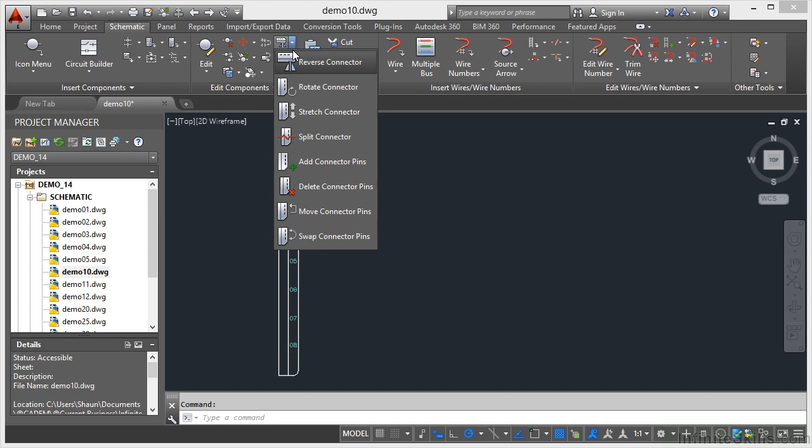Go up to the ribbon first, and in the Schematic tab, go to the Edit Components panel, click on the flyout, and you can see the Split Connector command. Click on it and come into the drawing area.

As soon as you do that, you have to select the connector block to split, so it's going to be this one here. Click on it, and then you're asked for the split point. Where do you want to split it? I'm going to go between 4 and 5, just there, and click on the block.

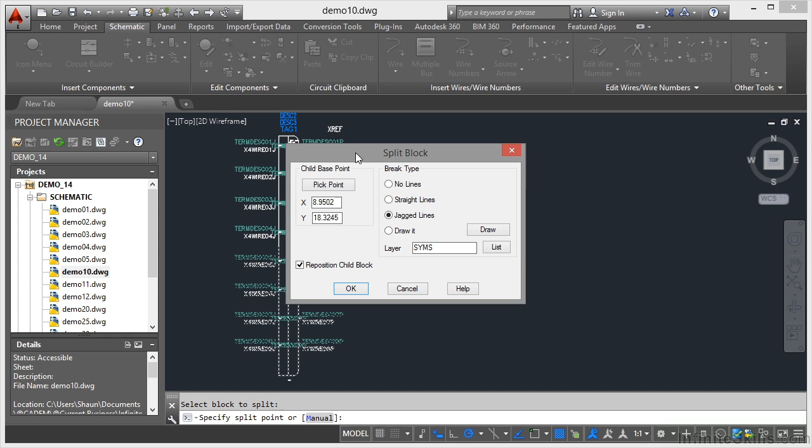As soon as I do that, a whole load of attributes appear, and you get this Split Block dialog box. Where you split it is the point where you separate parent and child. So this top bit of the connector block is the parent, and the bottom bit that you're splitting off and moving elsewhere becomes the child.

Obviously you want to reposition the child block, so make sure that option is ticked. You're going to pick a point where that base point is, or you can leave it as it is—it doesn't matter, because you've already split it.

You've got a choice of break type. You can have no lines, a straight line across the break, or jagged lines. I prefer jagged lines, so I'll leave that as it is. You can also choose how you want it to split—you might want to use just a diagonal line, for example.

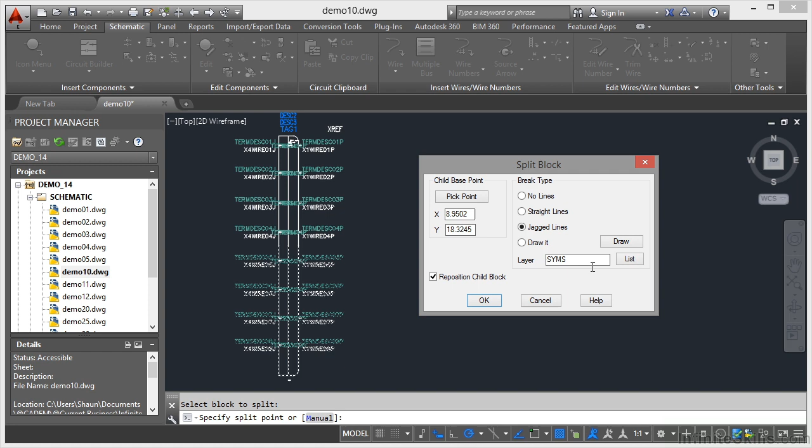The break type goes onto the layer SYMS, and you can list the layers if you want to and pick a different layer. I'm just going to click OK now. What will happen is I get my split—there's my split there, and I'm going to place it there.

Now where I've split that, you can see I've got my jagged lines. If I zoom in, there's the jagged line at the bottom, and there's the jagged line at the top. Now you might need to reposition some attributes—that's no problem at all.

You just click here, right click, and you still get the right-hand shortcut menu. Go to Attributes, and you want to move an attribute. Click there, select the attribute you want to move, which is going to be the PJ002 tag, right click or enter to confirm, pick a base point. I'm just going to move that up slightly, just so it sticks out away from the jagged lines, then press Escape or Enter to finish.

So you can see there that you've split your connector into two parts. Now you've got a question mark here—that's part of this block reference here now.

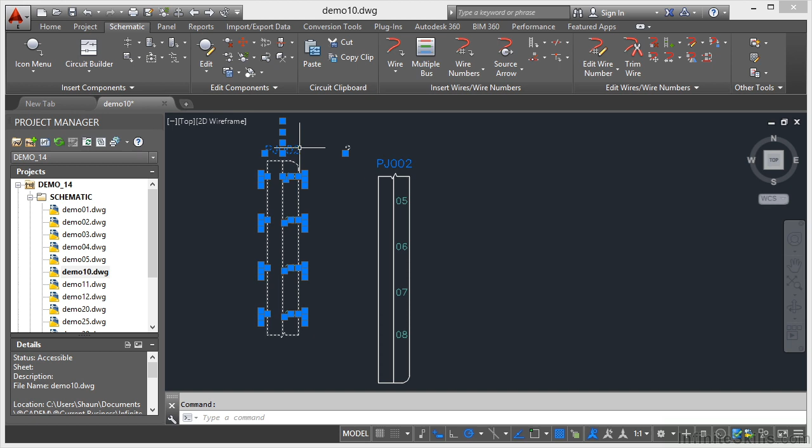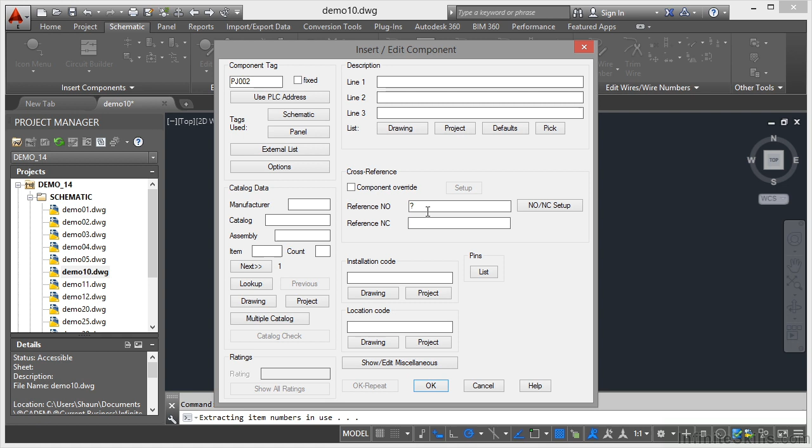So you can select it, right click and Edit Component on the shortcut menu, and you can see you've got PJ002 as the component tag. Now there's a question mark, reference NO or NC, so you don't know whether that's a normally open or normally closed reference. What you can do is just remove that if you want to, then click OK, and as you can see, it disappears.

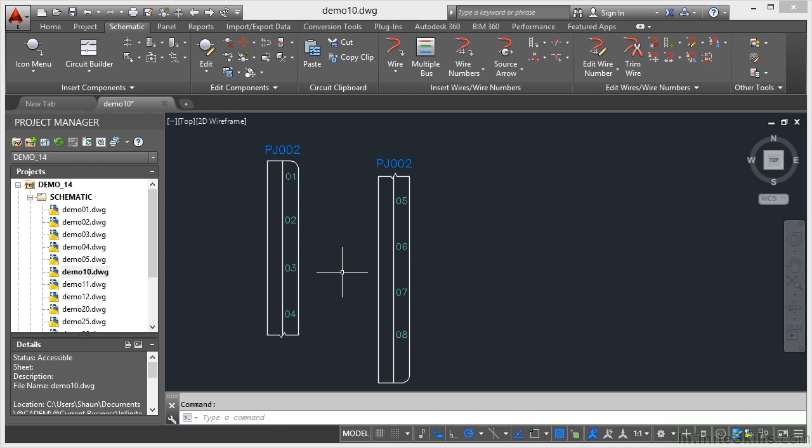But obviously, sometimes with connectors you need to know whether they're normally open or normally closed, and you need to know the cross-reference between the two split connectors. So you can see now you've got two connectors that form part of the same connector block, but they're split just for more ease of use on your AutoCAD electrical drawings.

You can also do that on the right-hand shortcut menu, and you can split again once you've already split. If I select that block and right-click, you'll notice I can still split the connector again if I want to. In this case I don't want to, but you can see the split connector option is also on the right-hand shortcut menu.

So you can use the ribbon or the mouse to split your connectors, and you can just keep splitting them over and over again, and they'll be linked together as long as you keep a parent-child relationship. So that's how you split your connectors in your AutoCAD electrical drawings.